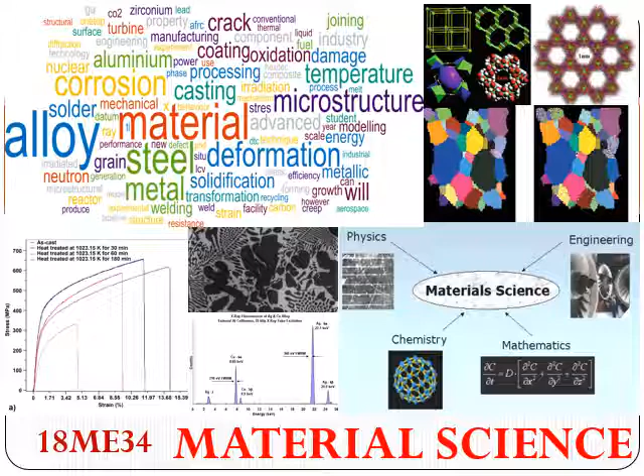In the coming slides, we'll see what are the course objectives, what are the course outcomes, and how your course is planned—the weightage, that is the marks and credits provided by the university, and the different modules where we are going to know the different things.

As we move on, we need to know the course objectives before learning this subject. Whenever we start a new task, we need to define our objectives first. For example, if you want to learn driving a vehicle, first you need to know each part of the vehicle, what are the functions of each part, and how all the parts are interrelated, and then you learn to drive. So each goal or task is defined with objectives. Likewise, each course defined in the current semester will have its own objectives.

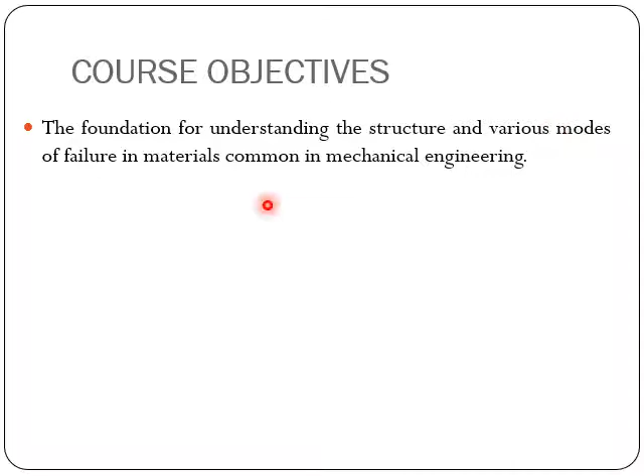When it comes to material science, first we need to understand the structures, and the structure is related to the various modes of failure. Next we need to know the properties of a material, that is, mechanical properties.

We have different categories of materials like metals, alloys, polymers, ceramics, smart materials, and composites. Each category has its own unique mechanical property which defines its application in the present scenario. Next is the means of modifying such properties.

As we said, we can tailor the properties of a material by controlling the parameters assigned in the processing, and also the failure of a material. Once you understand how you can tailor the properties with the help of processing, you can modify the properties of materials.

Next, the concept of use of materials for various applications is highlighted. Each application is defined with different properties, and each property is peculiar to each category of material.

For example, take polymers and ceramics. Polymers are not used for high load applications, but ceramics are very good in compressive strength. Ceramics can withstand hardness, that is resistance to scratches, but polymers are not in that way. Ceramics can withstand high temperature, but polymers cannot, and polymers degrade with respect to sunlight, but ceramics do not. So each category of material has a unique property which defines it with respect to applications.

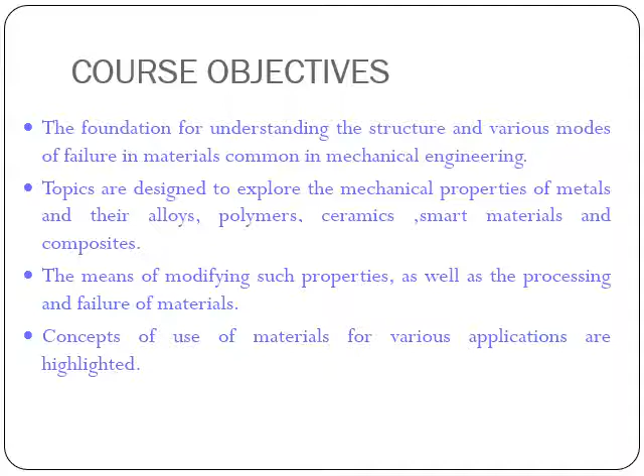Those are the course objectives which we need to define before starting the course.

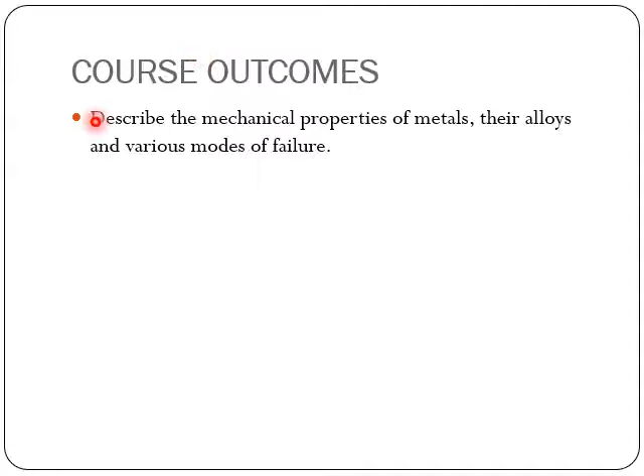Now these are the course outcomes. Once you finish learning at the end of the third semester, you should be in a position to describe the mechanical properties. So in the objectives we defined that we need to learn mechanical properties, and in the outcomes, once you finish the course, you should describe the mechanical properties of a material and its various failures, and understand the microstructure of ferrous and non-ferrous materials with respect to mechanical properties.

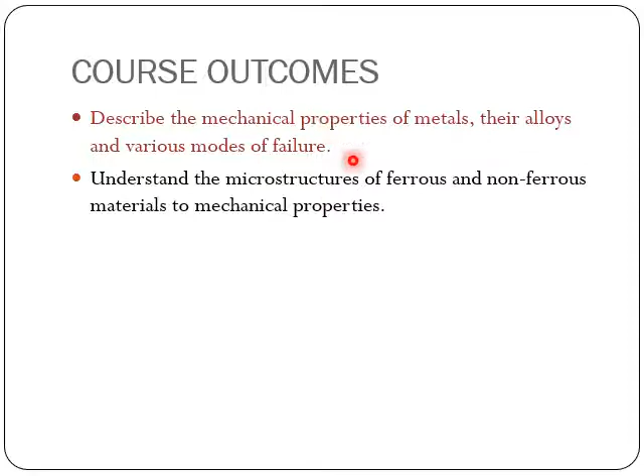When it comes to metals, the subcategories are ferrous and non-ferrous materials. We need to understand the mechanical properties with respect to ferrous and non-ferrous materials, and these properties are interrelated with the microstructures. Then, explain the process of heat treatment of various alloys—what exactly is heat treatment.

Okay, we'll discuss that when it comes to module number 3. But before that, let's consider baking items as an example.

You might have seen how exactly they process bread in a bakery. Initially they take maida, mix it with water, and with that proportion make whatever shapes they want. Then they keep it in the oven at a particular temperature and leave it for some time. After that, you can see changes in the property. Initially it was maida with water, but after coming out of the oven at a particular temperature, the property has changed. It became smooth and a bit tasty, like that.

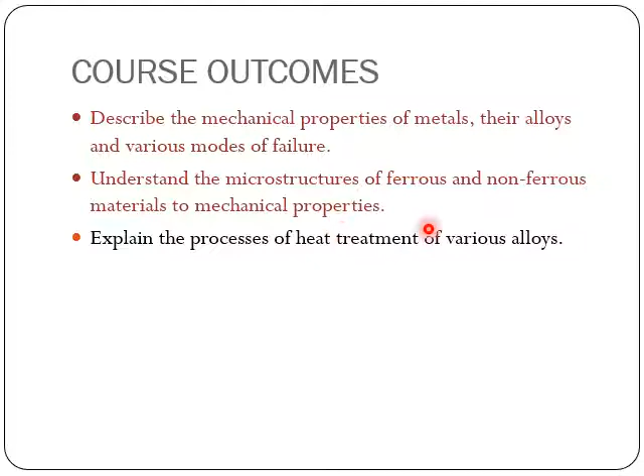That is what heat treatment is. Heat treatment means, with the effect of temperature, we are going to treat that material to change its property.

So understand the properties and potentialities of various materials available, and the material selection procedure. Like I said in the introduction, each category of engineers will define their own material. So according to that, we can synthesize material also with the available materials - that is what we call tailoring of materials.

Know about composite materials and their processing as well as application. This is the present scenario with composite materials, where we mix two or more materials having different properties, which are physically distinct. They are not going to mix up together - we can easily identify the two different materials.

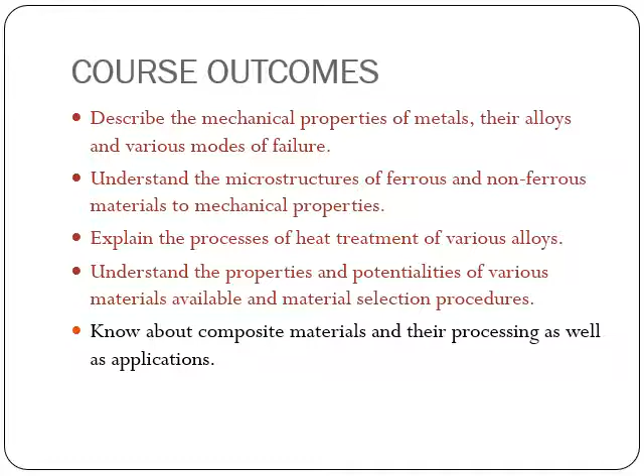The best example is a concrete wall, where you can see the cement, the jelly stones, and the TMT rods. That is the best example of a composite material, where you can see all three types which are physically distinct. We can easily identify there are three types of material mixed together, and they have made a composite material.

So these are the course outcomes. Once you finish that course, you should be in a position to understand, or tell what you have learned from that course.

Once it comes to the syllabus, as already said, the course code will be 18ME34. The marks allotted will be CIA, that is continuous internal assessment, 40 marks, and SEM exam will be 100 marks which will be converted to 60 marks. Exam hours will be 3 hours, teaching hours will be 3 hours per week, and the credit of the subject is 3.

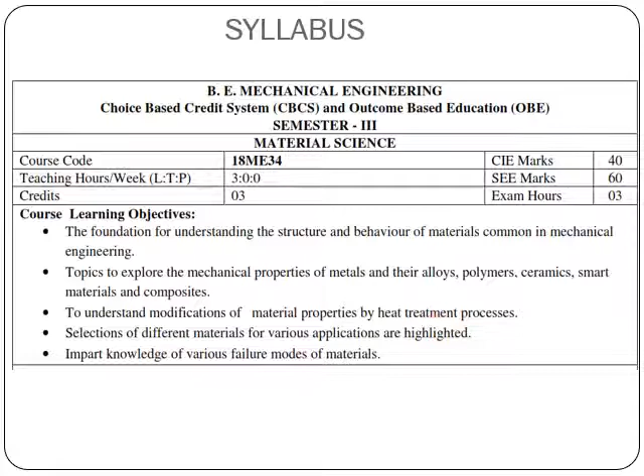So these are the course objectives. Already we have seen in the previous slide where you need to understand the different categories.

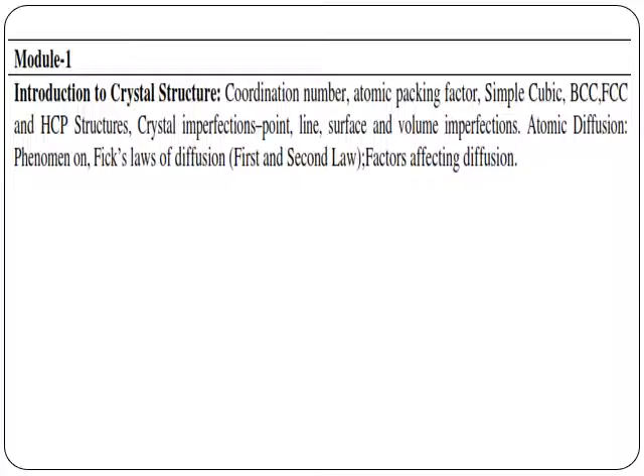When it comes to the syllabus, we have 5 modules: module 1, 2, 3, 4, and 5. In module 1 we are going to study crystal structures, and in module 1 we'll see the mechanical behavior - meaning once you understand the crystal structure, how these different types of crystal structures are going to behave. For example, in a crystal structure, we'll be having simple cubic, body-centered cubic, face-centered cubic, and hexagonal close packed.

So how these individually show their behavior when it comes to application, that we are going to study in the mechanical behavior. It is something like a relation between the crystal structure and the application.

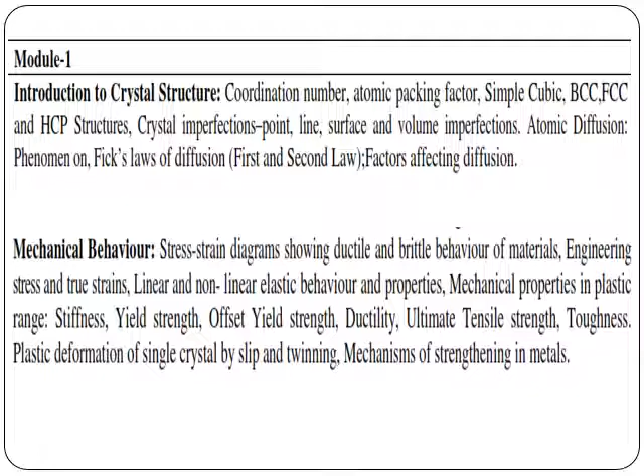So in module number 2, we'll study the failure of a material. For example, if you take a chocolate - any chocolate, say dairy milk or Kit Kat - before keeping it in the fridge, just try to break it. It will be like a liquid jelly-like structure and it will squeeze.

Now take the same chocolate, keep it in the freezer for a few minutes, take it out and try to break it. It will easily break. So that is what happens - before keeping it in the fridge, it will show something like elongation.

Okay, it will not break easily, but the one which you kept in the fridge will break easily. So we can say the one which is not kept in the fridge is an example of a ductile material, and the one which you kept in the fridge is an example of a brittle one.

So like that, if you take a sheet of paper and if you want to tear it, how will you tear it? You will just apply the force in the opposite direction. That is what is the shear force.

So those are like type 1, type 2, type 3 fractures. When it comes to practical application, you can see similar types of failures. And then we'll see what are the different types of loading, that is fatigue and creep. So fatigue is something like a rotating shaft.

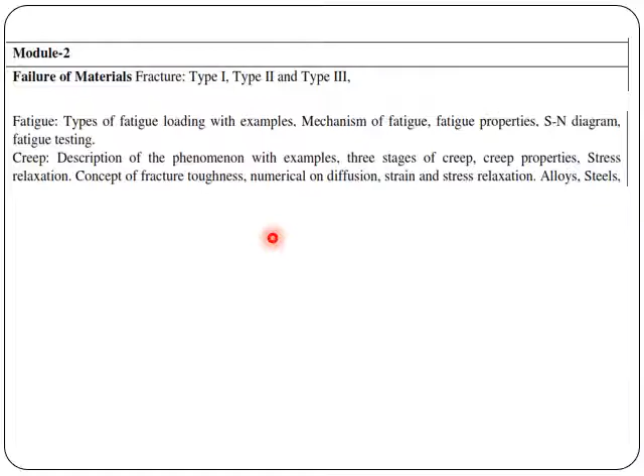If you keep that for maybe 5 years, 10 years, at a point of time it may break and fall on the ground. So that is creep, that is time dependent deformation.

And then we'll study about solidification. Solidification means, say for example, we want to come up with a new material, that is alloys. There we can have different mixtures, different proportions and all. Those things we are going to study in solidification.

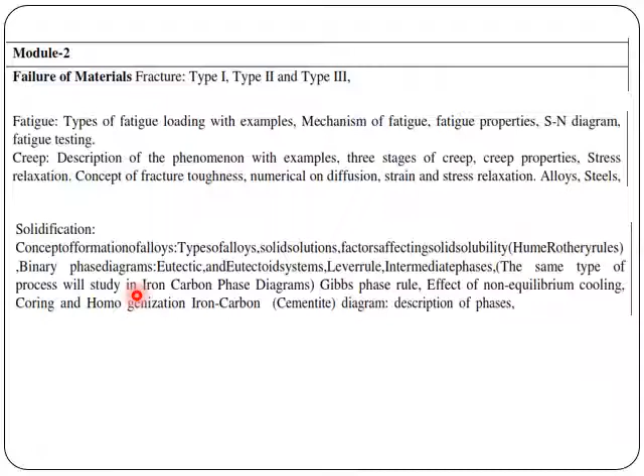And if you are going to mix at different fractions, how exactly we are going to get different properties, that is what is called the phase diagram. We can easily predict that if you're going to mix with a different proportion, what properties you are going to get. So that diagram we are going to call a phase diagram.

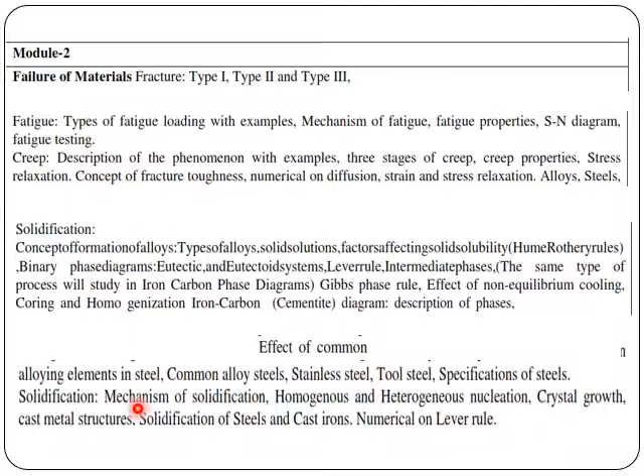Next, effect of alloying elements. Say for example, if you have iron and you're going to mix carbon into it, that alloy we are going to call steel. Again in the steel, if you're going to have manganese, silicon, chromium, nickel and all, we are going to get different types of steels. So that we are going to study in the third part of module number 2.

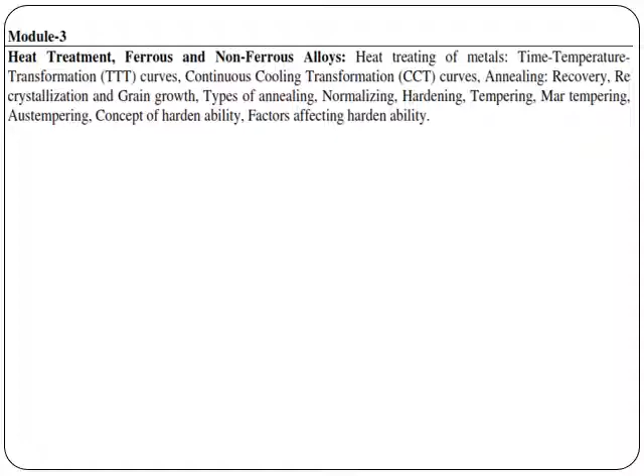So in module number 3, as already said in the introduction, we are going to study about heat treatment and non-ferrous alloys. Aluminium alloys, copper alloys, so all those things we are going to study in module number 3.

And surface hardening methods. Surface hardening method means, say for example, if you have surgical instruments, a knife and all, only the surface of that knife should be hardened, not the core. Not inside, only outside should be hard enough. So we call that surface hardening methods, and there also we can have these things.

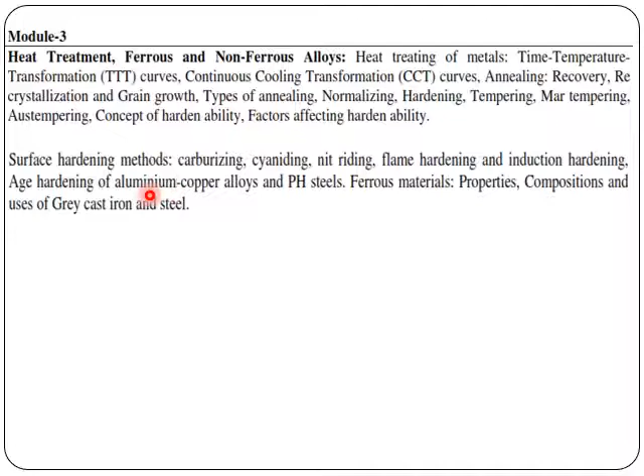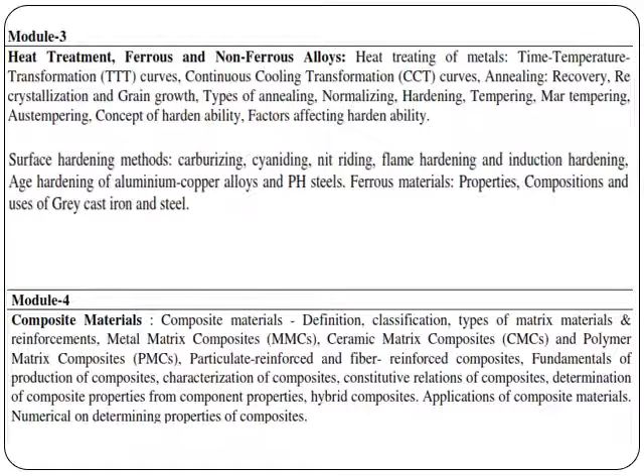And in module number 4, exclusively we are going to study about composite materials. What are the different types of composite materials, classifications, what are the properties, what processes are involved, what are the applications, and a few numericals in order to find out how exactly we can play with the different proportions of the material.

So in module number 5, that is the last one, we are going to study the advanced type of materials.

So we'll study first the structure, how exactly they are going to behave with that structure, and then we'll study the different categories in the materials, as well as how exactly they are going to fail, and as time passes we'll come to the present scenario where we are going to have new advanced materials, that is alloys which we have created.

Okay, so according to the applications, all those things we are going to study in module number 5. So as we move on, we'll jump into a little bit of introduction to the materials, then we'll take up module number 1.

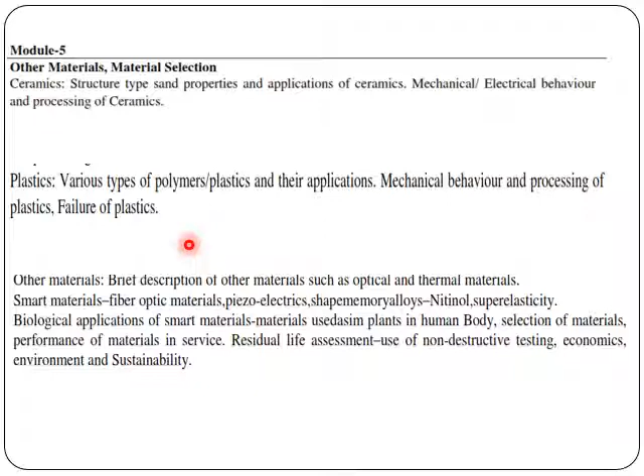As we move on, once we see the history, how the material has evolved, we can see the first one as the Stone Age, where human beings used stones for cutting purposes, even to light sparks, the fire, all those things, and to hunt animals.

And later on, it came to an age where they used metals like the Bronze Age, and next they came to the Iron Age, where steel has occupied the whole industry. The manufacturers tried new alloys, and later on the disadvantages associated with metals, that is the weight, the corrosion and the cost of processing, led to a new polymer age and concrete with steel, that is composite materials.

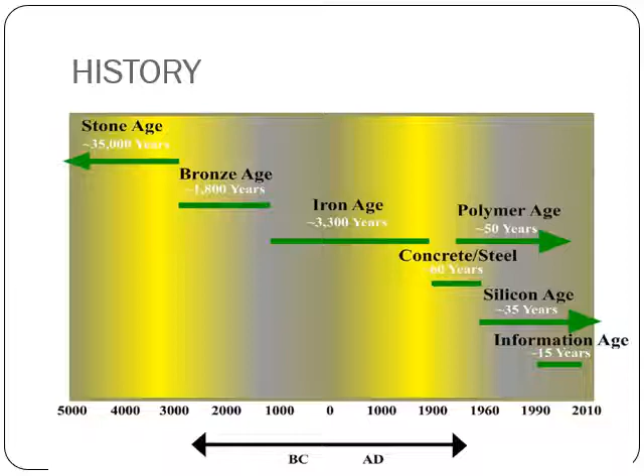And the evolution, the modernization in the electronics field has made us think of a silicon age. Now, at the present scenario, we can see composite materials with advanced materials like shape memory alloys ruling the world.

And when you look at a broad classification of the materials, we can say monolithic and hybrids. The monolithic are those obtained directly, with metals and alloys, even the non-metals also, in the ceramics and glasses, and the polymers and elastomers. And when it comes to hybrids, which are man-made with tailoring of the properties, we can say composites, sandwiched composites, lattice composites, and segments.

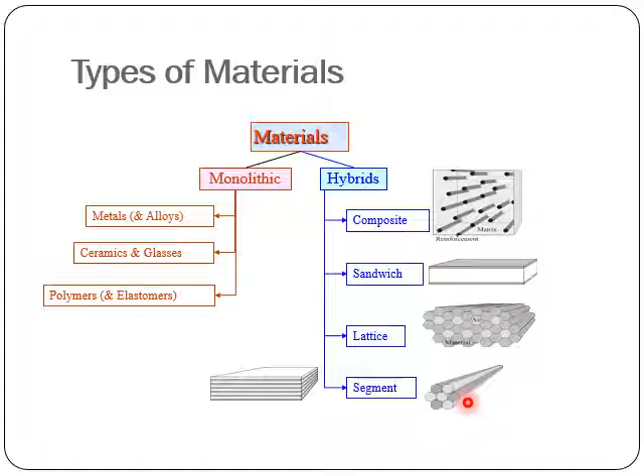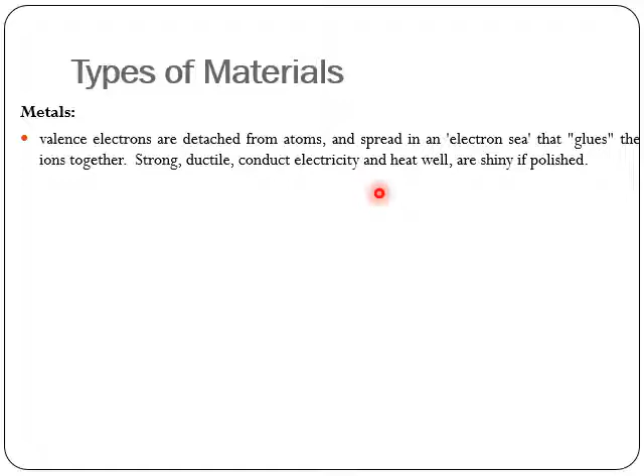So these things are tailored to a particular application; the properties are stitched in order to have the desired application. So when we say metals, we have valence electrons detached from the atoms and spread in an electron sea that glues the ions together. That is where we have protons, neutrons, electrons, bound by an electromagnetic force, which revolve, and the free electrons give rise to a current. So all those things come in metals.

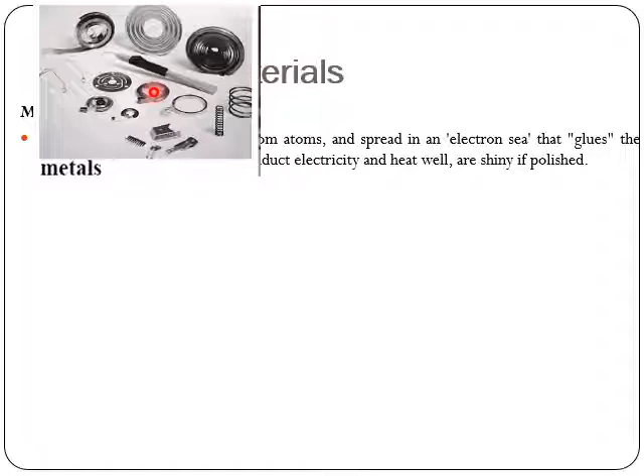So we find a variety of applications for metals. Wherever it is not possible to replace them with any new material, metals are still used extensively. Then the semiconductors, in electronics and communication devices, for example photovoltaic cells. There we have semiconductors, N type and P type, where silicon and pentavalent materials play an important role. You can see PCBs where we use these semiconductors.

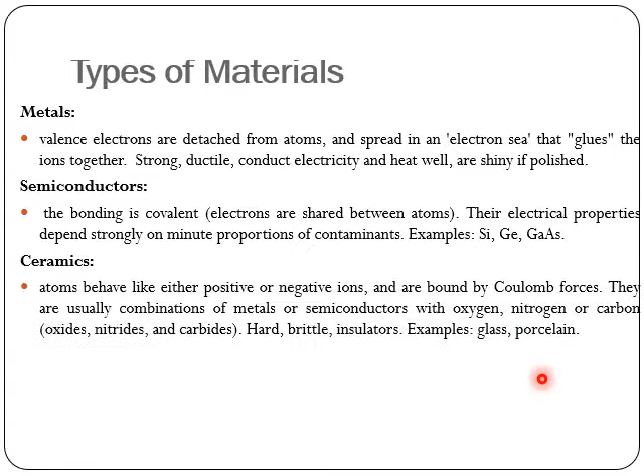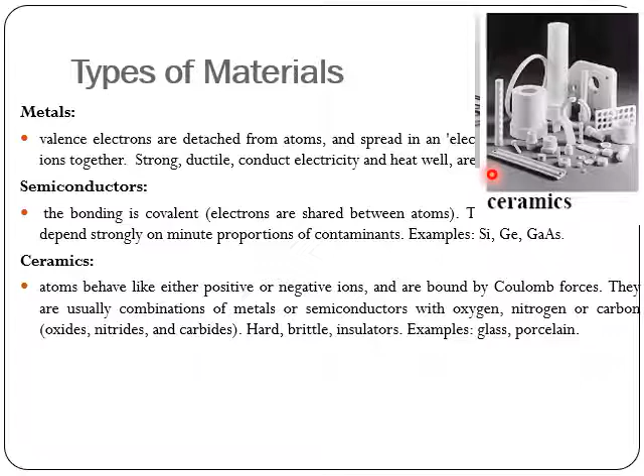So next is ceramics. Already we are well known with the oxides of metals. Aluminum oxide can withstand high temperature, refractory materials, and ones having very good high compression strength. So your household ceramic tiles, all those things come under ceramics.

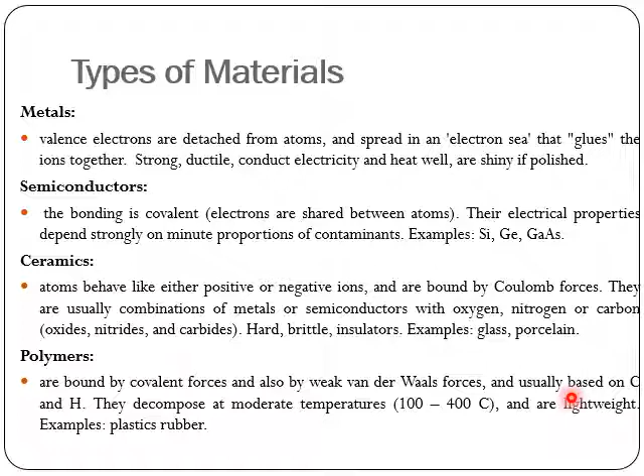And these metals and ceramics are replaced with polymers. These are bonded by weak van der Waals forces, but they are very lightweight and corrosion resistant. So wherever it is not a matter of taking up a load, there we can have polymer materials. Nowadays in toys and in many small scale industries, all the metal gears are replaced with polymer materials.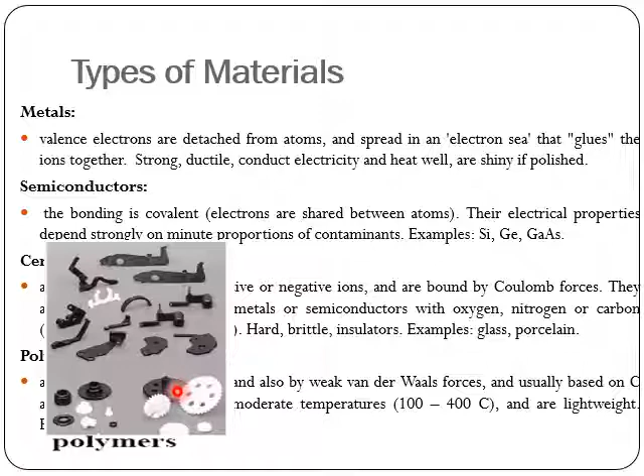So when you see the application, still the metals are having a major contribution in the field of application. In the present scenario, the composites are replacing the metals, but a major portion is taken up by the metals itself.

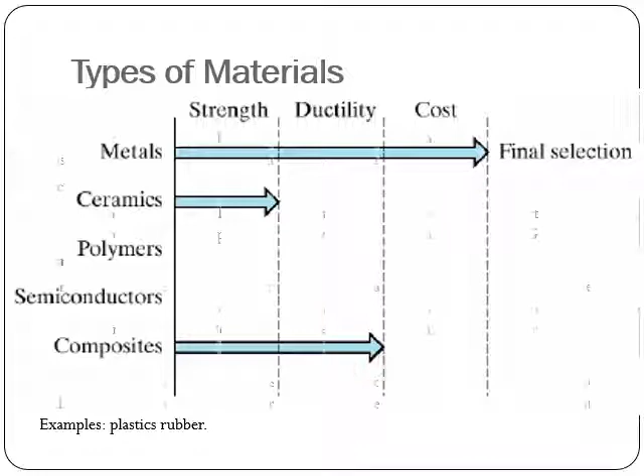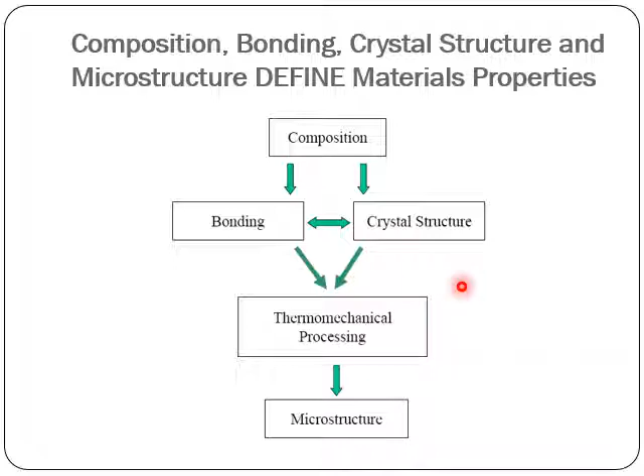So the composition again in turn is defined with the bonding and the crystal structure, the processing again in turn with the bonding and the crystal structure, and the microstructure again in turn with the thermomechanical processing. And if you see, how the things are going to change.

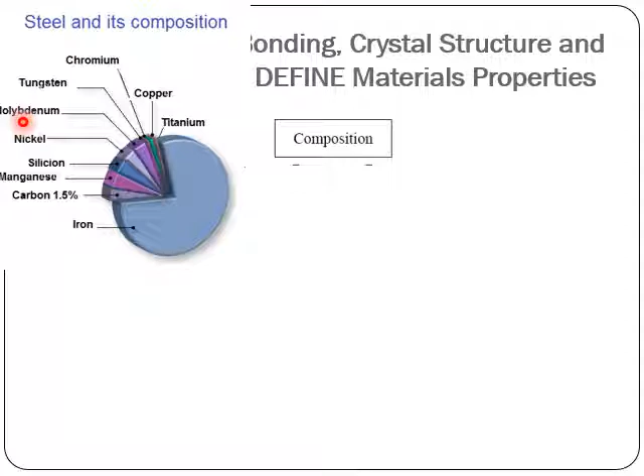Say for example, composition: if you take a steel, the major composition in the steel is iron, and all these alloy elements are going to contribute to the different properties in the steel. If you increase the chromium, there will be corrosion resistance, and if you increase the copper content, the ductility will be more. If you increase the nickel, the hardness will be more, that is, the resistance will be more. So like that, one can play with the composition depending upon the application.

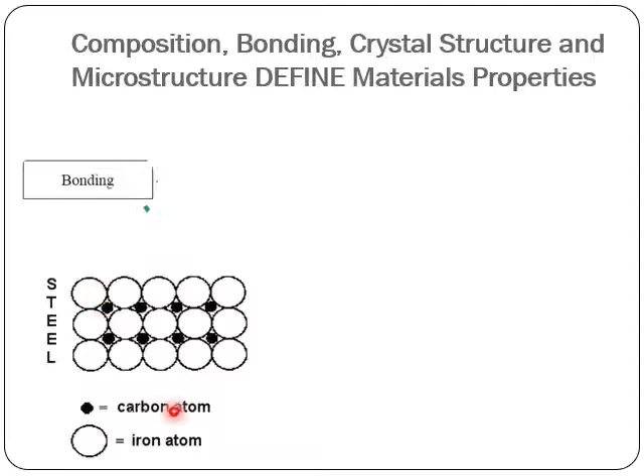So once we finalize the composition, next will be the bonding. Here we have taken an example of a steel again. Carbon atoms are going to occupy the interstitial position. The space between the atoms, we call them interstitial atoms. Sometimes the parent atoms, these white color atoms, are replaced with one more atom. That is what we call substitutional. So depending upon the bonding also, the structure will change. You can see it here.

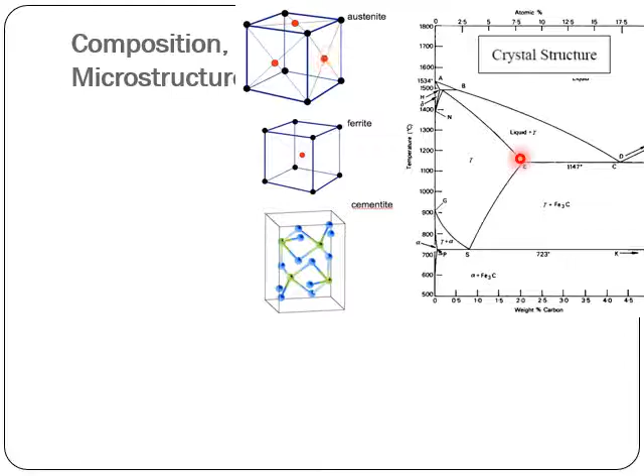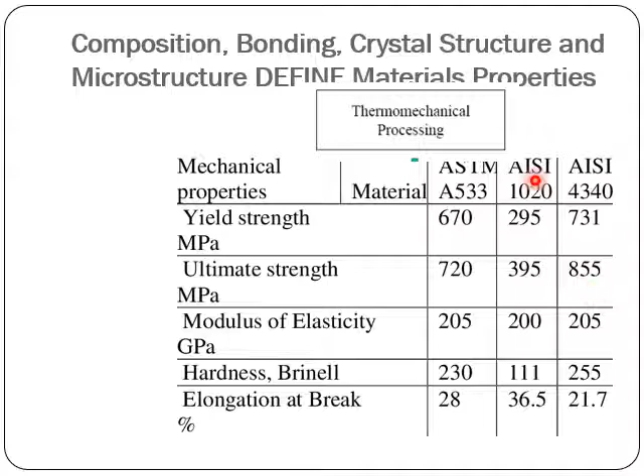Normally, in a general way, we say FCC will be ductile, BCC will be brittle, tetragonal will be brittle. So whatever the application demands in reality, according to that one can select the crystal structure. Thermomechanical processing: you can see the mechanical strength in different grades of steel, which is going to vary depending upon the composition of the steel.

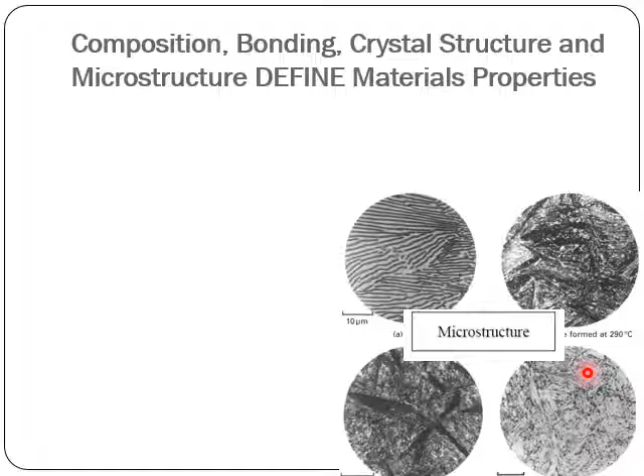And the last one is the microstructure. Here you can see there are different types of microstructure depending upon the thermomechanical processing. You can have a needle-like structure, or a needle-like structure with less density. Like that you can have different microstructures. So all these, composition, bonding, crystal structure, mechanical processing, and the microstructure, are interdependent, not independent. Once you finish the process, it doesn't mean you have come up with the required property.

So once you are done with the selection of crystal structure, processing and all, the next thing as engineers we need to look into is the material property. One can look into the chemical property, the physical property, the mechanical property, and the dimensional stability, according to the application of a material. One has to see what property that material demands.

So as a mechanical engineer, you can say what type of strength you want. Either you want tension, or compression, or only toughness, or only elasticity, hardness, ductility, like that.

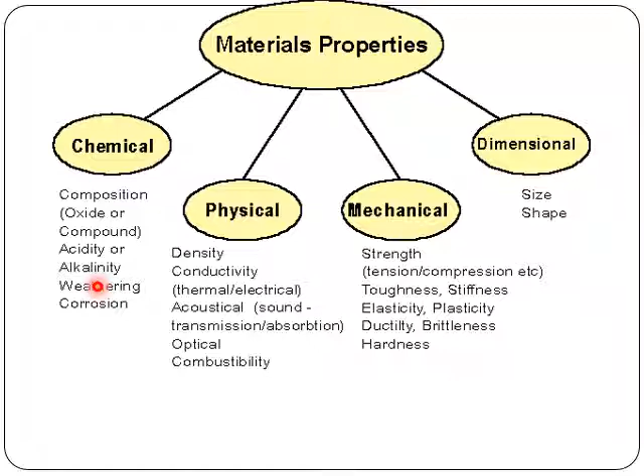Or as a basic one, which one you want? Whether you want an electrically conductive material or a thermal conductive material, or a chemical composition, whether it should be corrosion resistant, or whether it should be oxides of the metal, like that. But when it comes to the overall thing, as a mechanical engineer, these are the properties which we are interested in for any material.

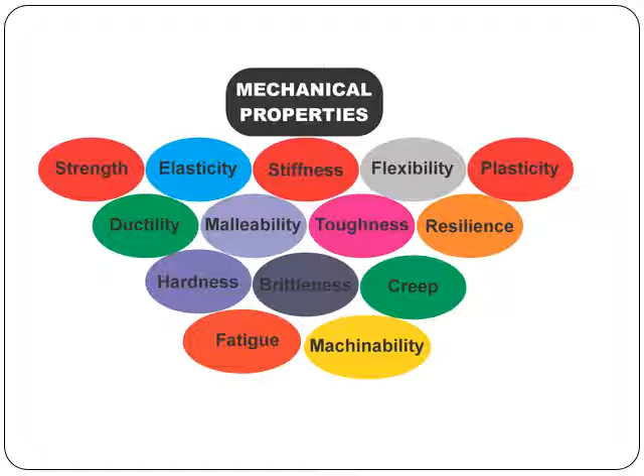One is the strength, elasticity, stiffness, flexibility, plasticity, resilience, creep, machinability, fatigue, hardness, ductility, malleability, and brittleness. Means what the application demands, according to that one can choose which mechanical properties they want for that application, and according to that they can tailor the material. So like that one can view the things, and according to that they can demand the things.

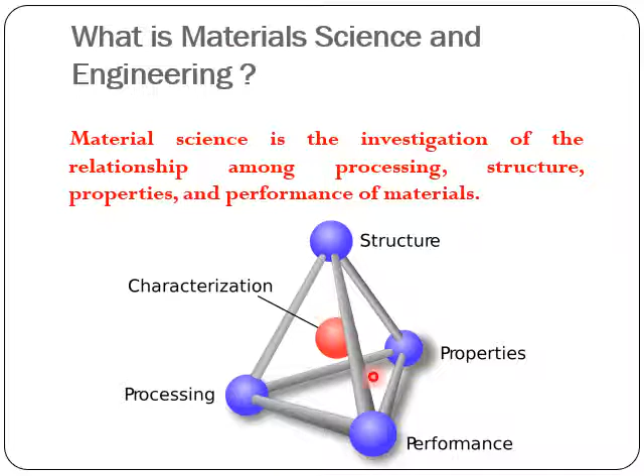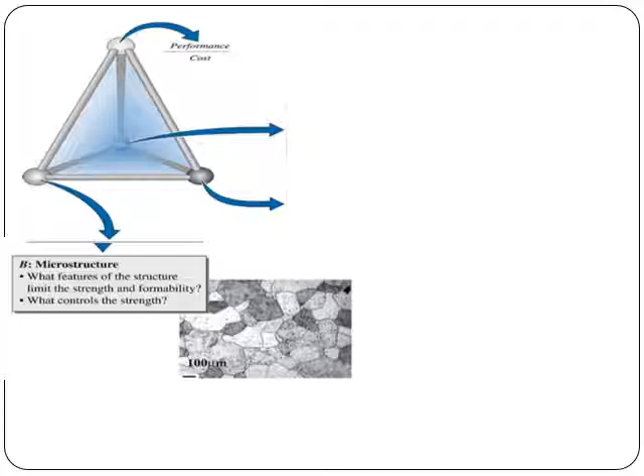So when it comes to the overall thing, you can see the structure, the processing, the performance, and the property, all these things are interrelated. Tetrahedron. The characterization plays an important role in order to find out what the process is going to have. Just to have an example, a microstructure. What are the features of a structure? Say in a crystal structure, whether it's FCC, BCC, HCP, or simple cubic. Depending upon that, we are going to find what type of microstructure it is going to have.

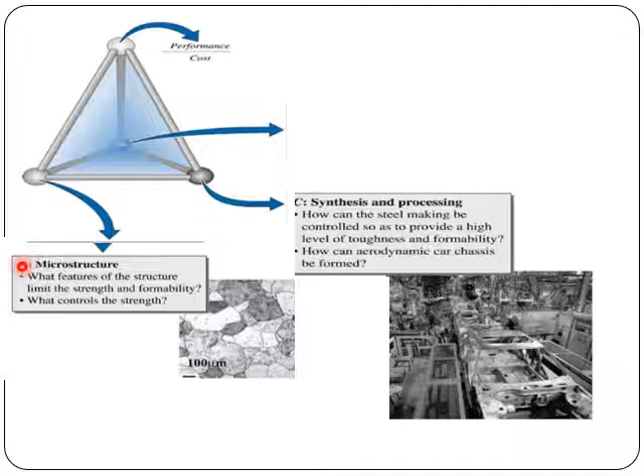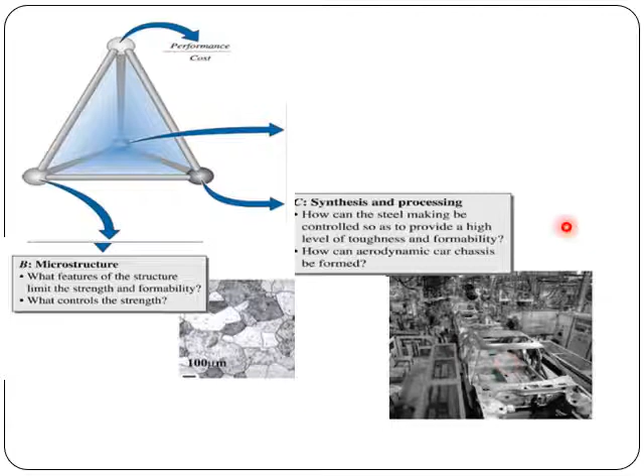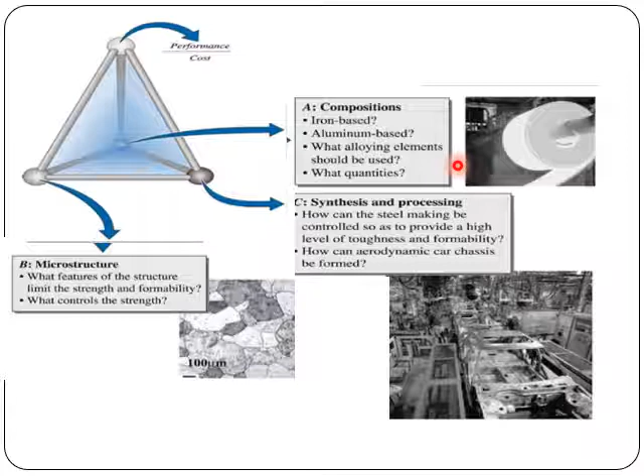Once we finalize the microstructure, what type of synthesis and process it demands. Whether it is a ductile material or a brittle material is found using the microstructure, and depending upon whether it is ductile or brittle, the synthesis and processing step is followed. You can say here it's rolling, normally used for a ductile material. Once it is done, we need to check the composition, what type of composition it is having. Once the process is done, whether it has lost its composition or retained it, that we need to check before its application.

And at last, performance. After all these things, it is brought to reality with the application, and how exactly it is going to perform in reality, that we need to check. So at each stage it needs characterization, that is the center part. In order to evaluate the microstructure, or to find out the synthesis and the processing, or to evaluate the composition, or to check the performance of a material, one has to go through the characterization techniques.

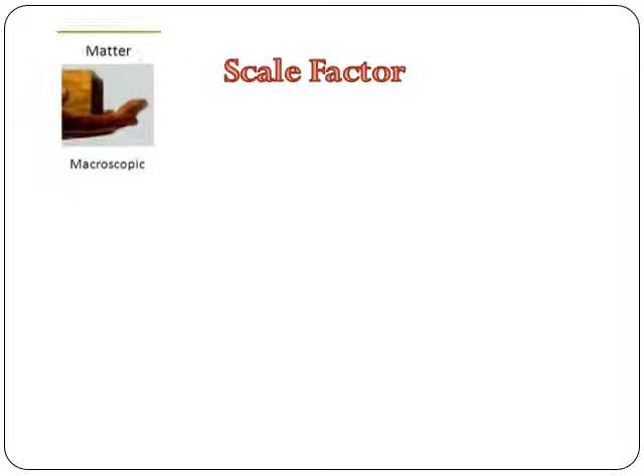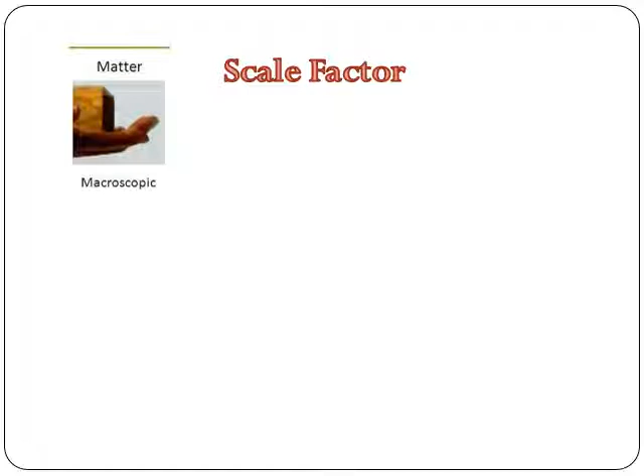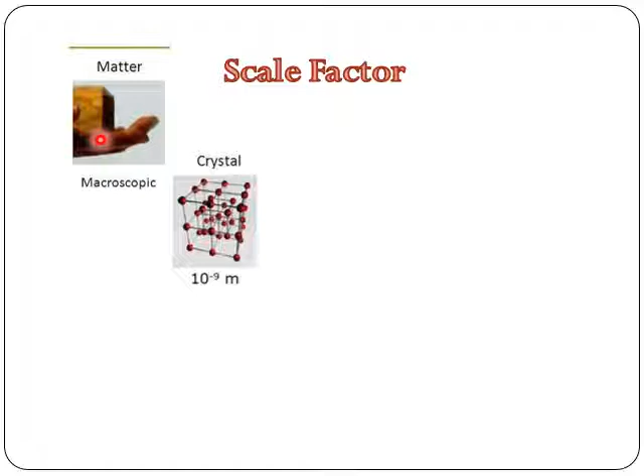And once you look at a material, as we move on from microstructure to the composition to the synthesis to the real structure, how a material matters. When you see the material in a bulk way, you can see it like this. One step below that, we talk about a crystal. One step below that, atoms. One step below that, the atomic nucleus. And inside, we find the electrons, neutrons, protons and all. At each neutron, electron and all, the scale factor is 10 to the power of minus 18 meters. So as we move down the scale, macroscopic to microscopic, all these things matter.

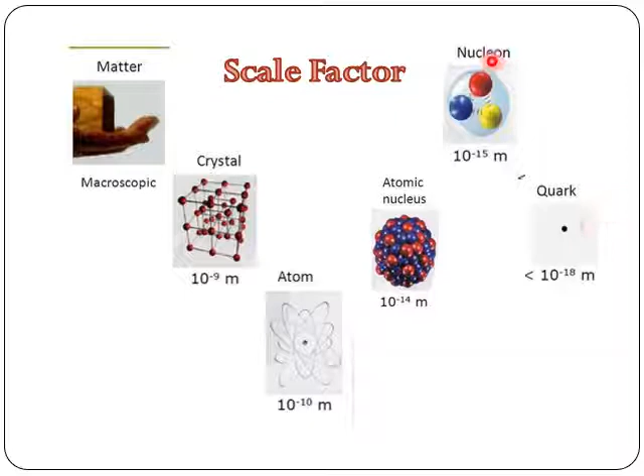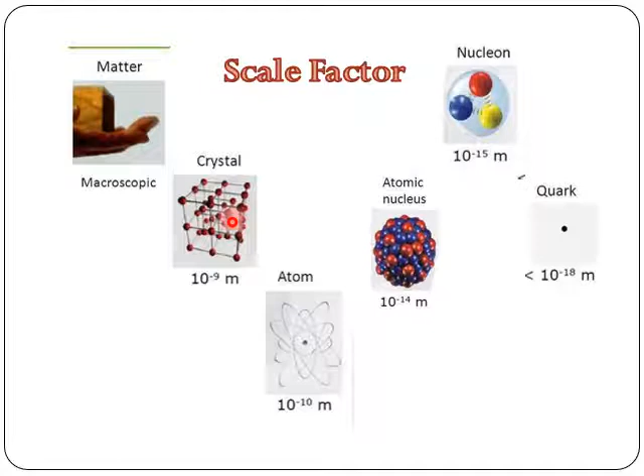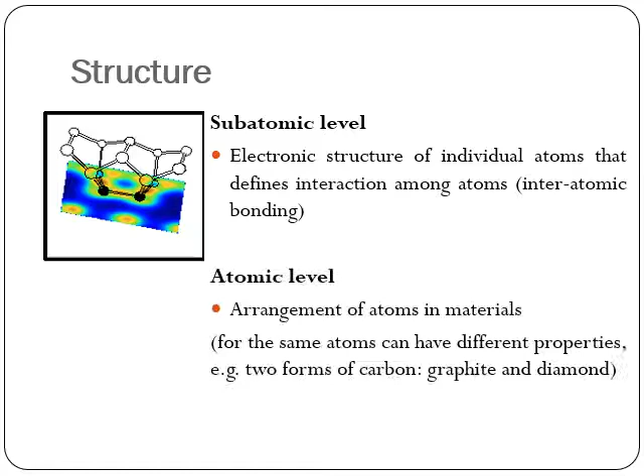The arrangement of neutrons and electrons inside the atom, the arrangement of atoms within a crystal structure, and the arrangement of these crystal structures within a material leads to the performance of a material. You can't ignore the size and arrangement of each electron, neutron and atom within the crystal structure. Ultimately, it leads to the properties of a material. Now you see the subatomic level like this, atomic level like this, microscopic structure like this, and macroscopic structure. So once you analyze step by step downwards, where is the origin, from subatomic to atomic to microscopic to the